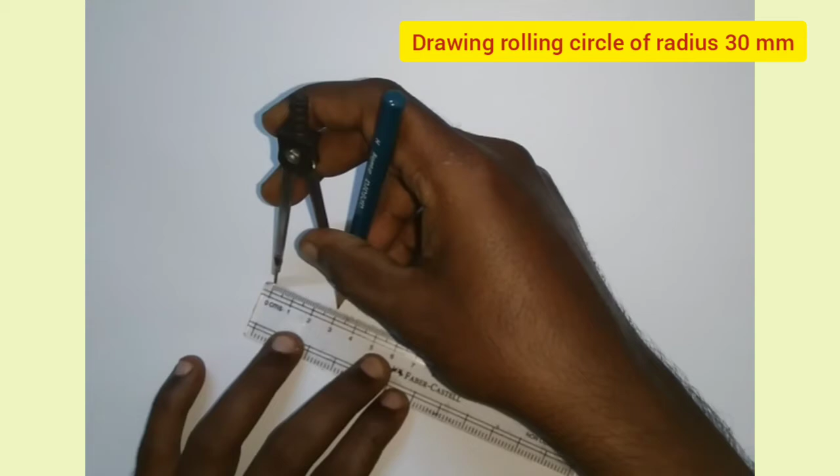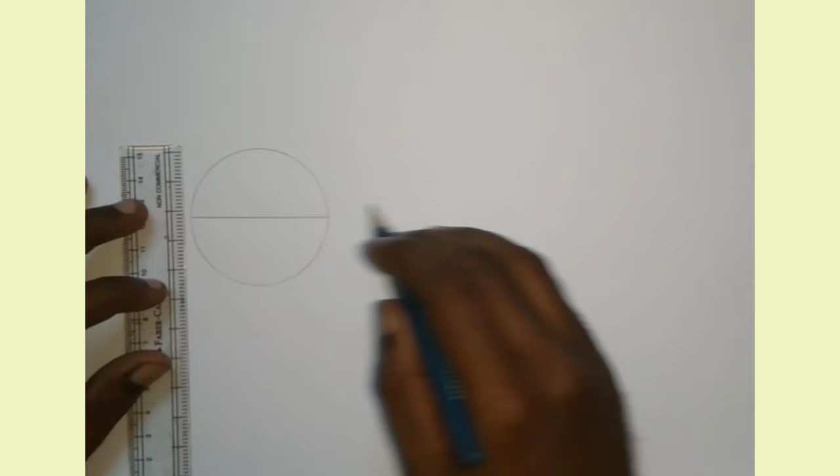So first I have to draw the initial position of rolling circle, that is a circle of radius 30 mm. The center of the circle is CA, and initially the diameter PQ is horizontal and Q is on the right side of point P. Okay. It is given that the circle will complete half a revolution, so the distance covered is pi r, that is 94.2 mm.

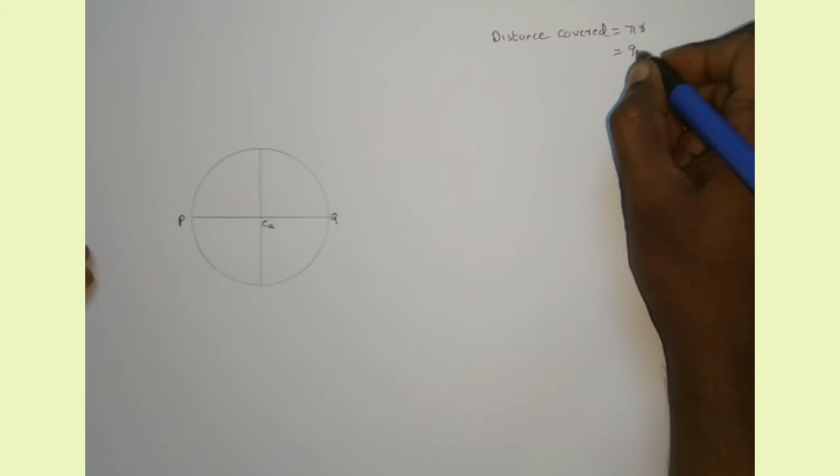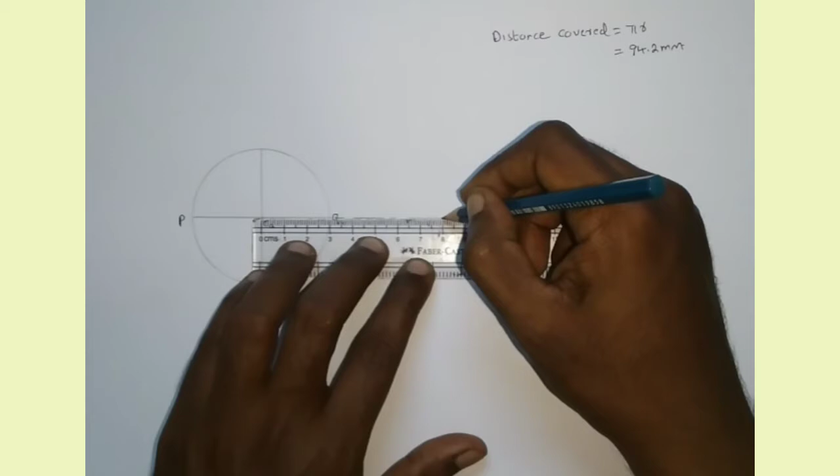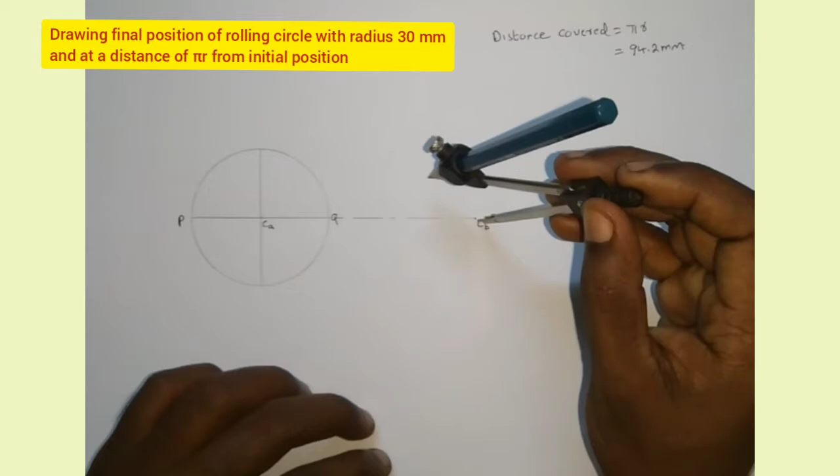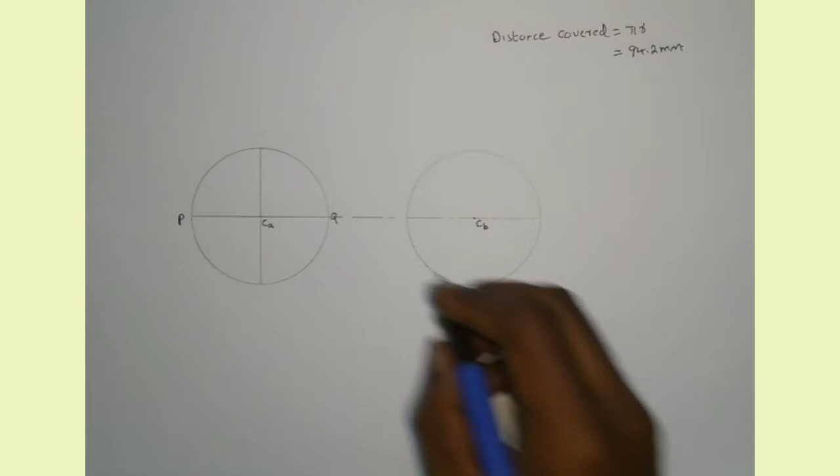So I am going to draw the locus of the center of rolling circle, that is 94.2 mm. The center of the final position of rolling circle is CB. Now I am measuring 30 mm, and with the center as CB I am drawing a circle, that is the final position of rolling circle. So after completing half a revolution, the position of Q changes. Q is on the left side and P is on the right side in final position of the rolling circle.

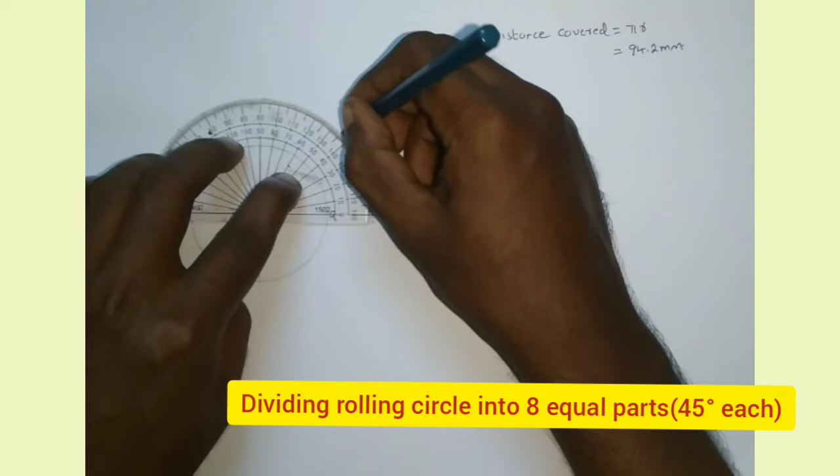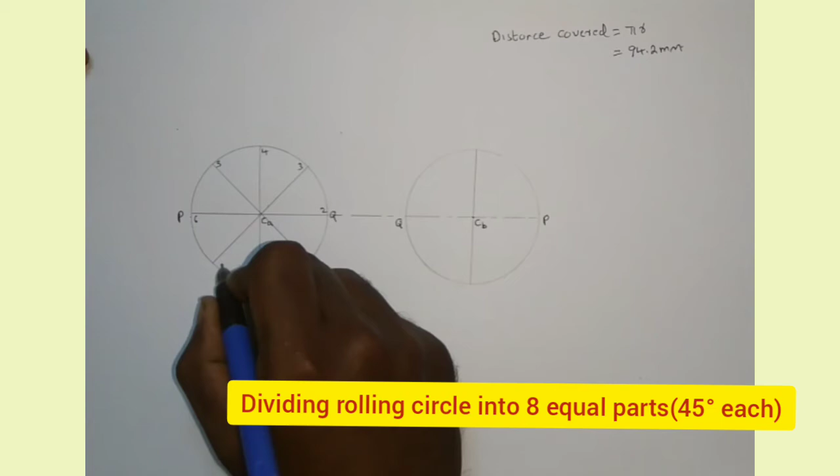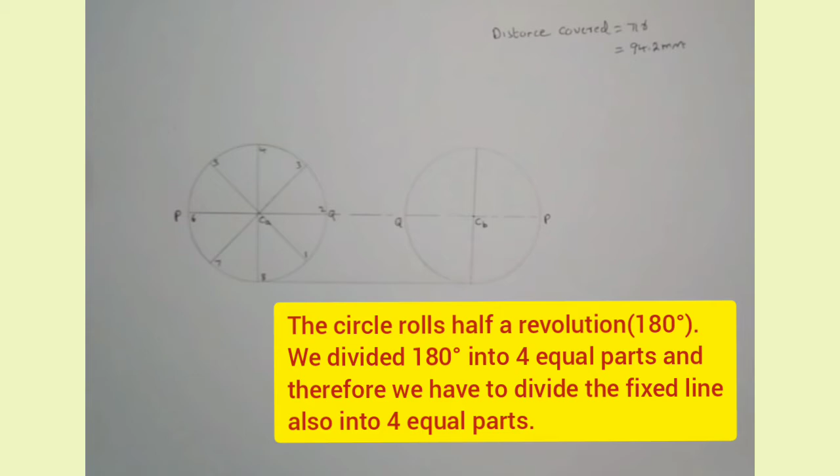Now I am going to divide the circle into 8 equal parts, that is 45 degree each. Now I am marking the points as 1, 2, 3, 4, 5, 6, 7, 8. Now I am drawing the fixed line. The circle rolls on the fixed line, and I am going to divide the fixed line into 4 equal parts because the circle rolls half a revolution, and in the figure I divided half a revolution, that is 180 degree, into 4 equal parts. So I have to divide the fixed line also into 4 equal parts.

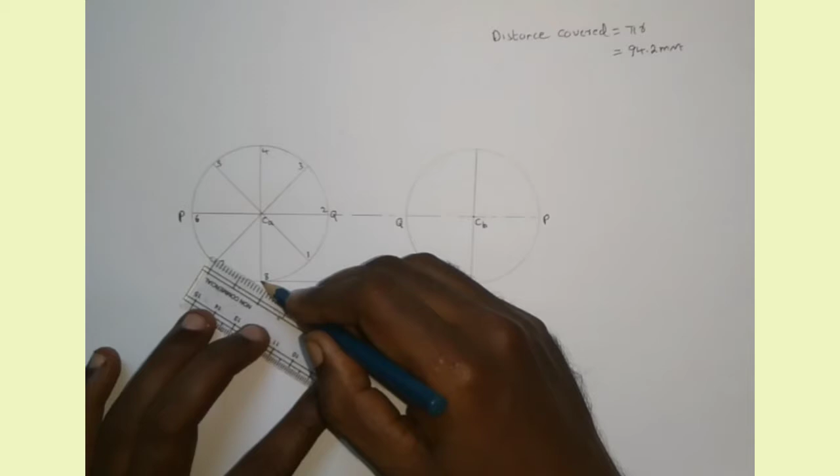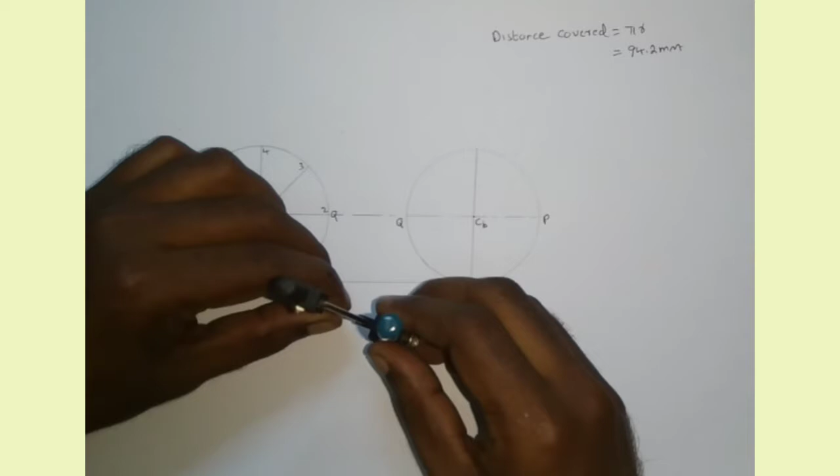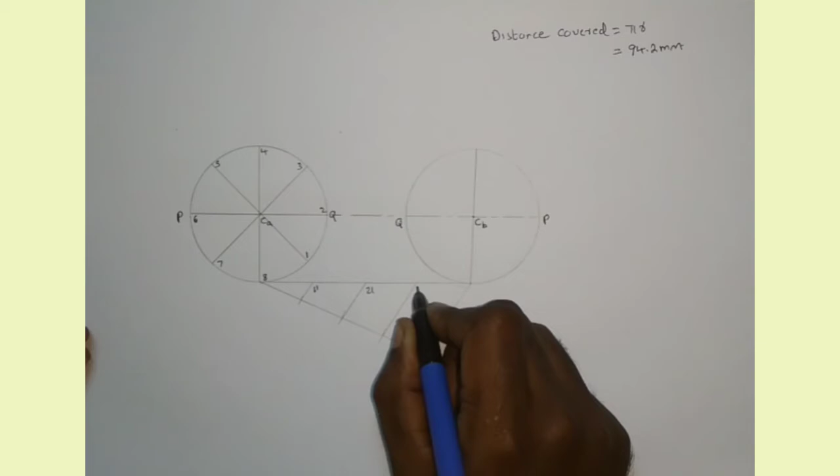So I am dividing the fixed line into 4 equal parts. You know how to divide a line into equal number of parts. We already discussed the procedure in my previous videos, so I am not going to explain it. I am marking the points as 1 dash, 2 dash, 3 dash and 4 dash. And now I am drawing vertical lines from each point to the line CACB.

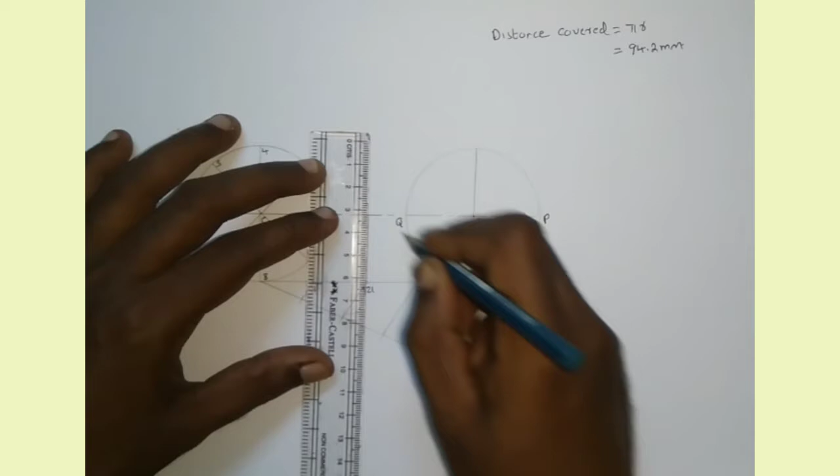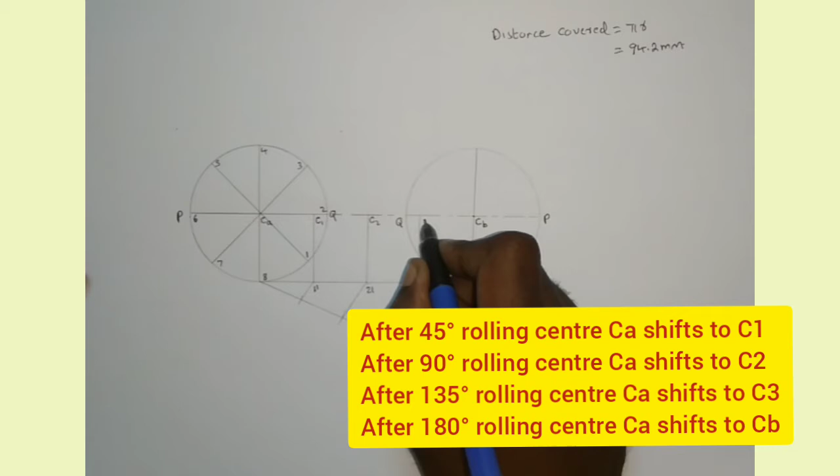So now I am marking the position of the center of circle after 45 degree of rotation, that is C1. After 90 degree of rotation, the center becomes C2. And after 135 degree of rotation, center becomes C3. And finally after 180 degree of rotation, center becomes CB. Now I am drawing some lines parallel to the fixed line, that is from 1 and 7, 3 and 5 and from point 4. These lines are parallel to the fixed line. I am marking the direction of rolling, that is clockwise direction.

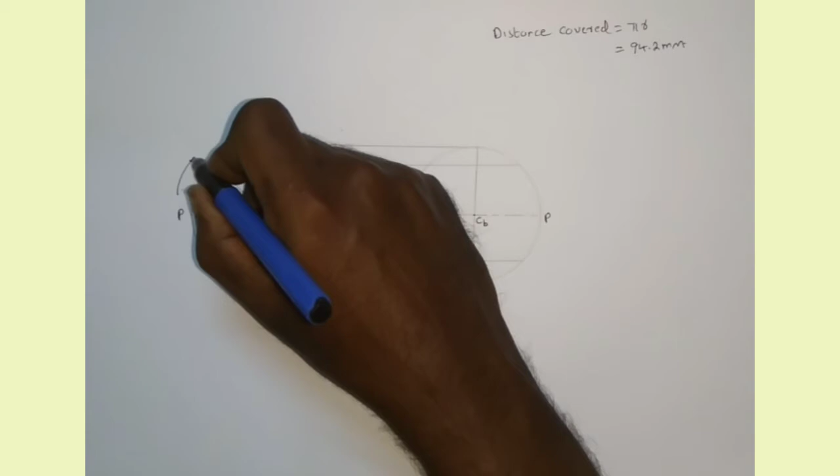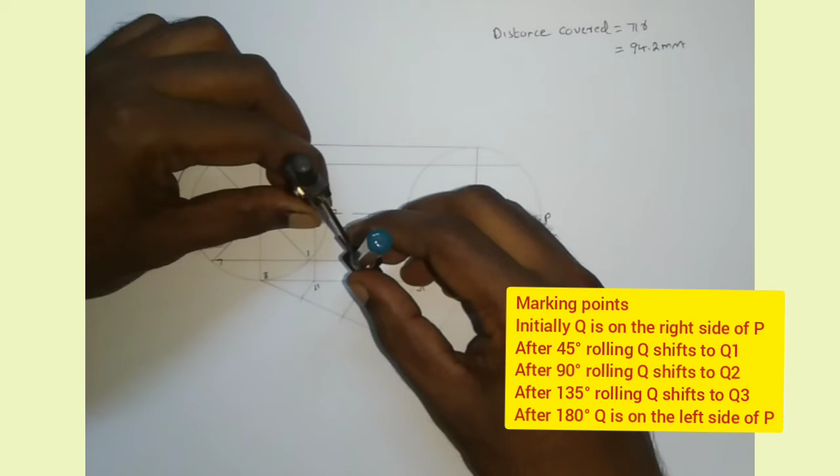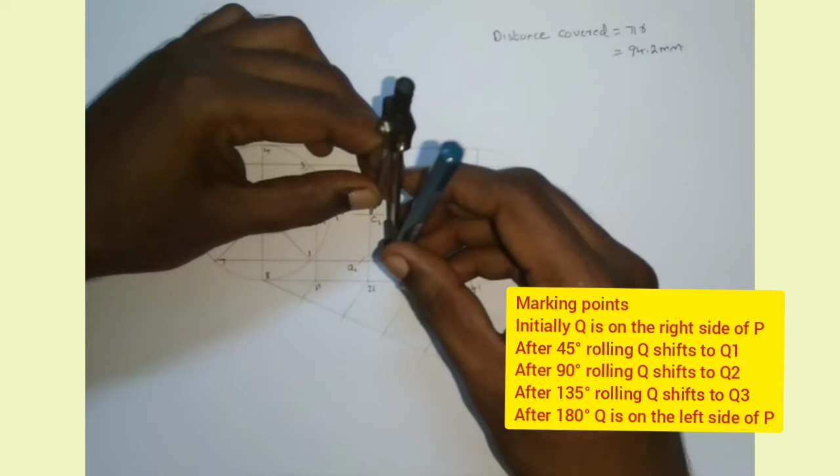Now I am measuring 15 mm on compass, and after 45 degree of rotation, the center of the circle becomes C1, and from C1 I am cutting an arc on the line through point 1. That is the next position of point Q, that is Q1 I am marking. And after 90 degree of rotation, the center of the circle becomes C2, and from C2 I am cutting an arc on the line passing through point 8, and that point is Q2.

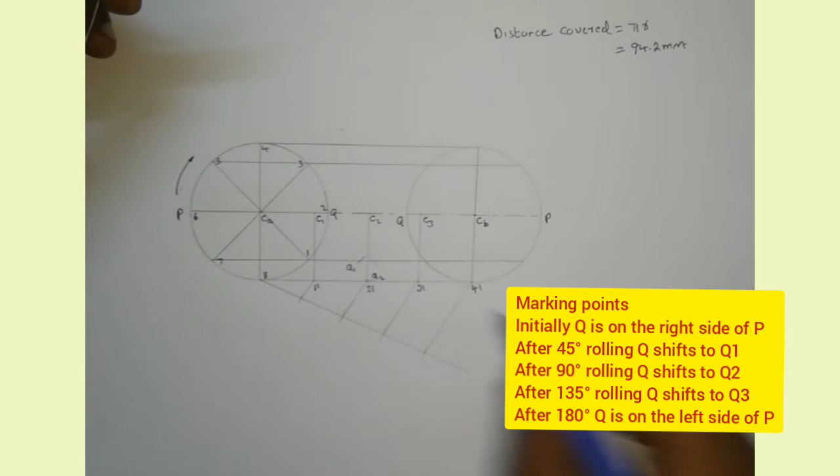After 135 degree of rotation, the center of the circle becomes C3, and from C3 I am cutting an arc on the line passing through point 1, that is Q3. And after 180 degree of rotation, the center of the circle becomes Cb, we already marked, and the position of point Q is also marked, that is on the left side of point P.

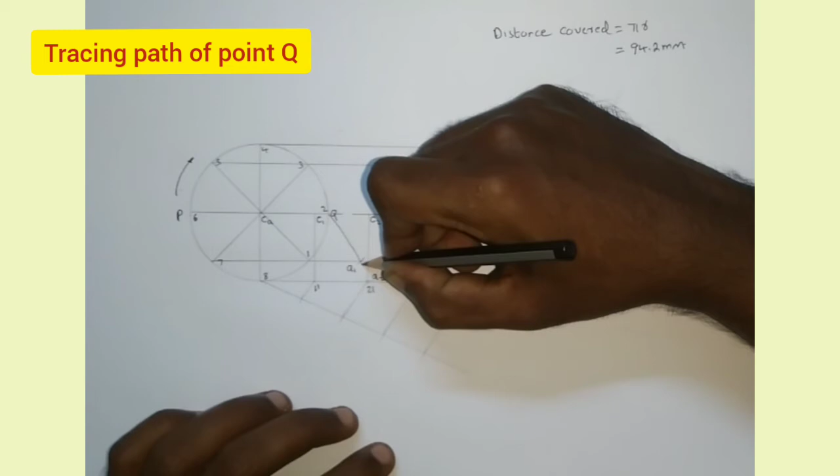Now I am tracing the path of point Q for half a revolution. It is a curve, and that curve is a cycloid. I am just connecting the points. Okay, that is the path traced by point Q. Now I am marking the radius of the rolling circle, that is R30. I am also writing radius as R equals 30 mm. And now I am dimensioning the distance covered by the rolling circle, that is pi r.

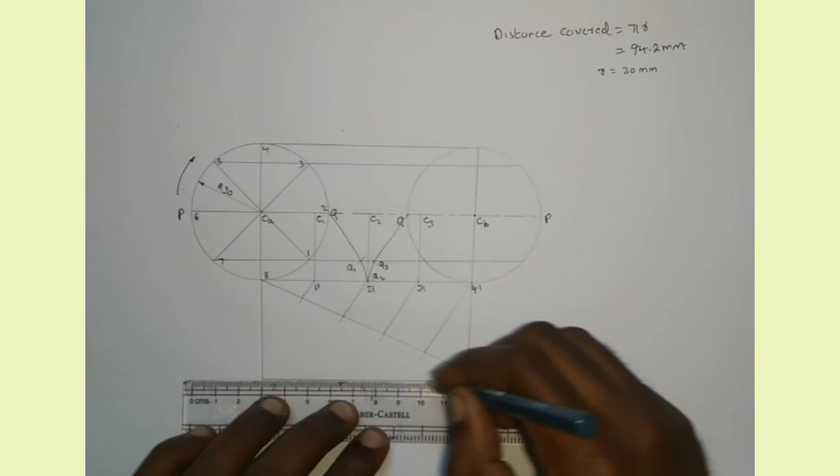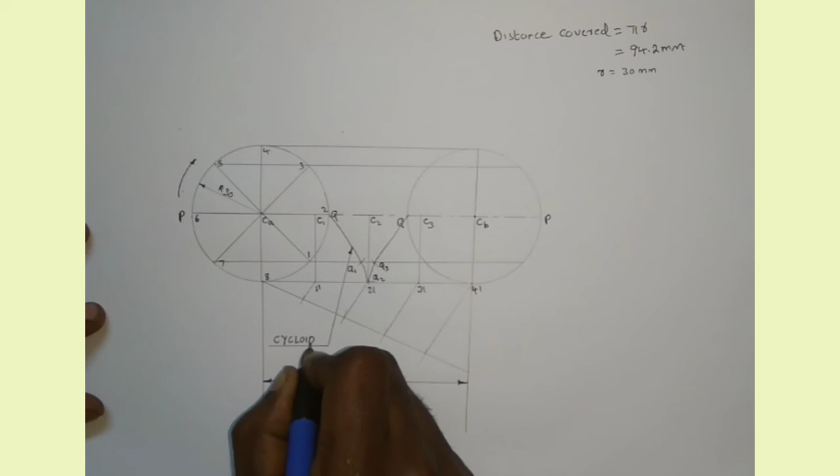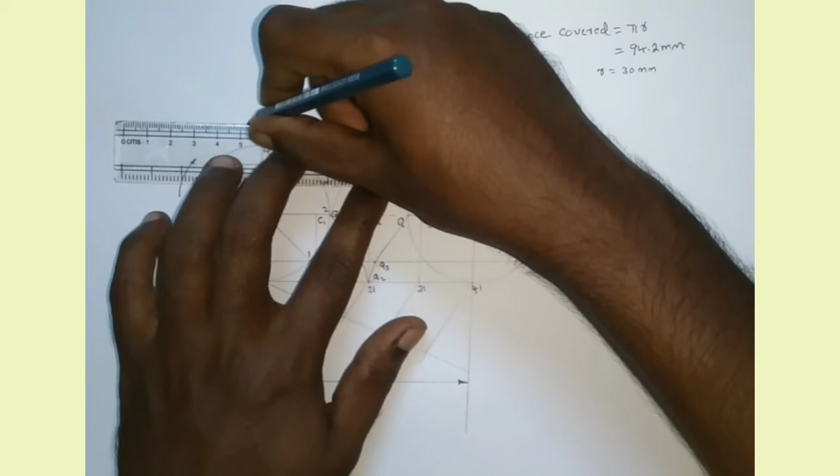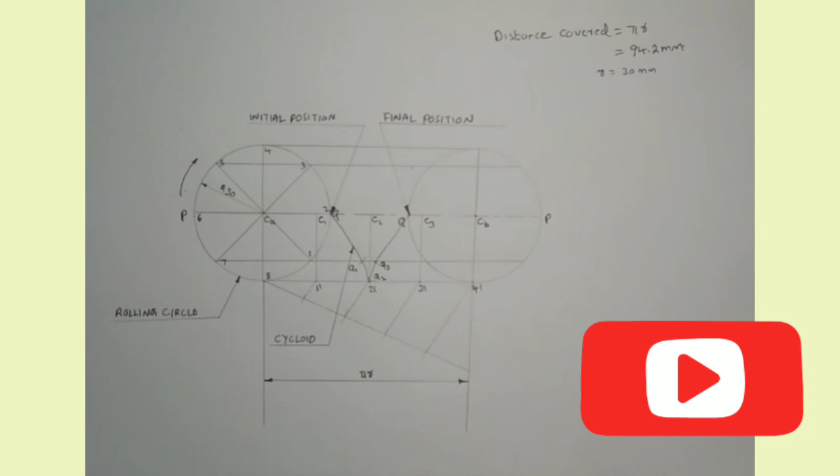I am naming the curve as cycloid, that is the path traced by point Q. It is a cycloid. Okay, that is our rolling circle. And I am marking the initial position of point Q, that is on the right side of point P. I am also marking the final position of point Q after half a revolution, that is on the left side of point P. So our drawing is completed.